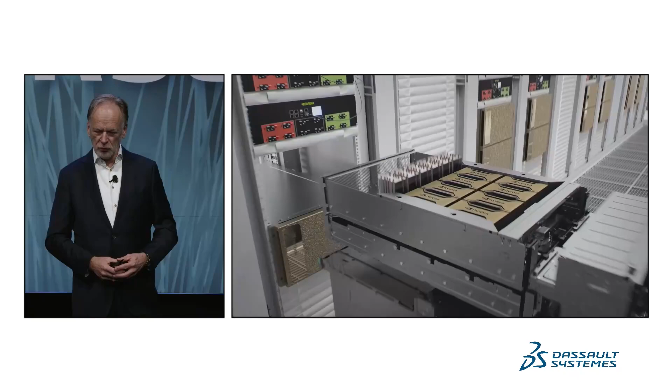Looking inside such a transistor, we see that it is actually a three-dimensional structure. At the lowest level, the finest structures are where we store our data or do our processing. But we have to get the data in and out, we have to get power in and out, so there's a three-dimensional structure of multiple layers, with the finest layers at the bottom and coarser structures on top.

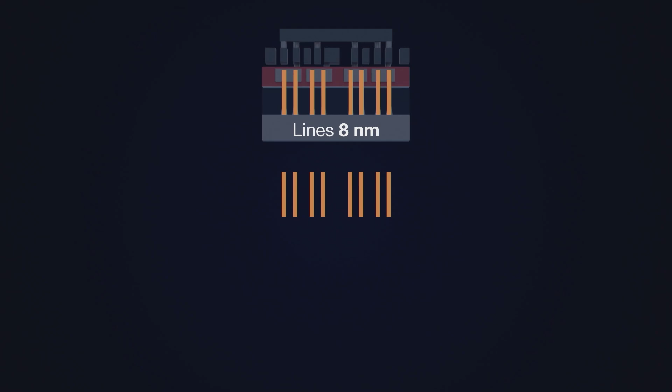And if we look at what we are able to print today, the finest structures are about 8 nanometer lines and an 8 nanometer space. To put it in perspective, 5,000 lines and space pairs would fit in the diameter of a single human hair.

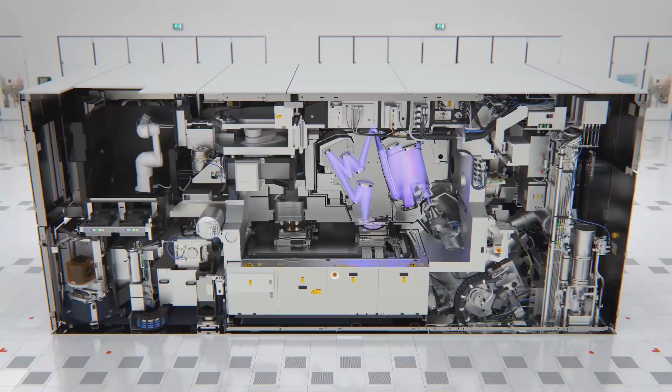So to print such a very small structure, or to print any structure, is done by the litho system, which is basically a nano copying machine. There is a pattern stored on the mask, which is illuminated by light, and that pattern is repeatedly imaged onto a 300 millimeter wafer. Thus the pattern is transferred into a single layer, and layer after layer are being built.

As mentioned in the introduction, what is critical, what basically describes the pace of our industry, the semiconductor industry, has been defined by Gordon Moore in his visionary paper in 1965, where Gordon Moore noted that an ever-growing component count, the number of components per chip, would increase, originally doubling every year. And as such, he predicted something like mobile home computing, which remember, 1965, the audacity to write that down.

So I took this doubling every year and extrapolated it 10 years from 1965 to 1975, from 60 components to 60,000 components on a chip. A pretty wild extrapolation. And it turned out to be ridiculously accurate.

One of my colleagues called this Moore's Law. Rather than just being something that chronicles the progress of the industry, it became something that drove the progress of the industry. And indeed, it did so for many decades.

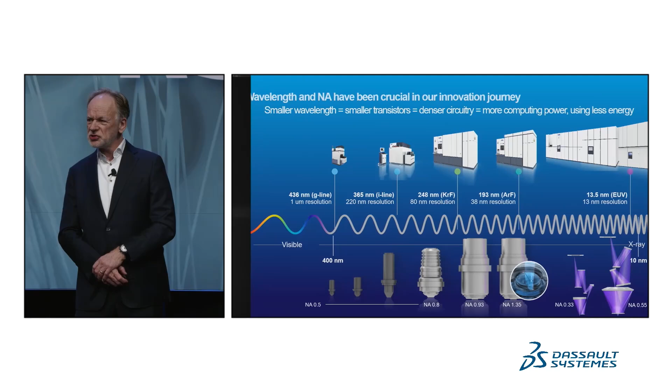So a quarter wavelength over NA is the smallest feature you can print with optical lithography. Over the years, the industry has progressed from one wavelength to another, changing the color of the light roughly every decade. We went from a mercury lamp, G-line, to an I-line lamp, mercury 365 nanometer, krypton fluoride laser 248, argon fluoride laser.

Within this decade, we actually increased the numerical aperture by making bigger and more powerful lenses. As you can see, we went from about 0.5 using the G-line lens about 40 years ago to the immersion lens, which has an NA of 1.35.

And then we made a giant leap. The industry made a giant leap. The industry moved from 193 to EUV, which has a wavelength of 13.5 nanometers, roughly a 15x reduction in wavelength. Remember, the critical dimension scales with the wavelength, so this gave unprecedented shrink capability.

But the EUV wavelength change did not come overnight, nor was it easy. First pioneering work happened in Japan, the US, and Europe in the mid-80s of the previous century. I myself started the program at ASML in '97. It took until 2019 to have your first phone with a chip made with EUV.

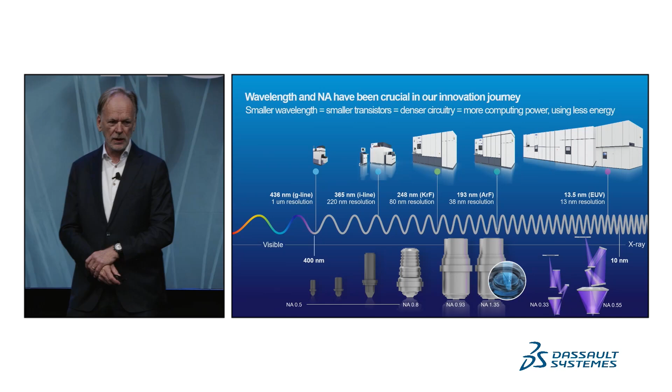And what made it so hard? If you look at the light, EUV light can be seen in nature, but only in the corona of the sun. That's where EUV comes from. So that means we had to make it artificially—we had to bring the sun into the fab.

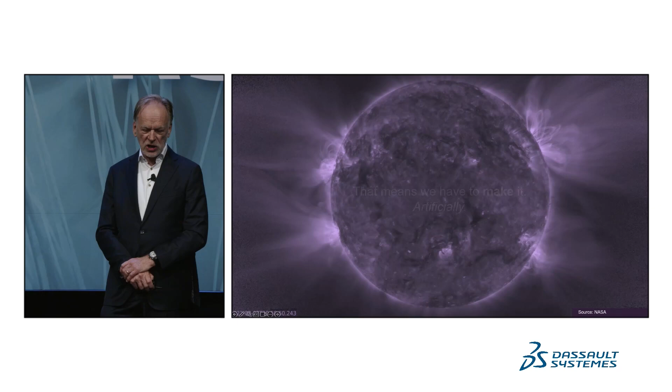The way we did it, after some trial and error—AI was not at our rescue at the time—we ended up with a setup where we shoot a very powerful laser at a tiny tin droplet, about 30 micrometers, into a vacuum vessel. We hit it with a laser twice: first to turn it into a pancake, then to generate a plasma, making it about 500,000 degrees Celsius.

And you do this 50,000 times per second. That way you can generate enough EUV light to have a production-worthy, high-volume system. The light is then captured by the optics and shined towards the mask, which is finally imaged onto your wafer. So why was it so hard?

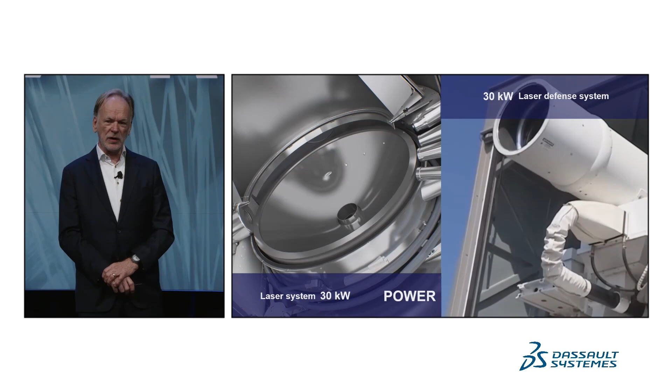Next to the science of understanding plasma and physics, there were major technical innovations required on the engineering side. To put it in perspective, we shine a 30 kilowatt laser on one of these tin droplets—the equivalent power of a military system used to shoot down tanks, satellites, etc. So you don't want to be a tin droplet in your life, ever.

Secondly, the optics—this is even more astonishing. The optics come from a good partner called Zeiss. The aspheric optics are made with a precision of 20 picometers, about 1,000 times more accurate than the James Webb Space Telescope.

Not only are they able to produce it so accurately, they also position the mirror with unprecedented accuracy. They can shine light with such precision it's equivalent to hitting a coin on the moon with a beam of light from Earth. So this was just one of the technological challenges that had to be mastered, next to the source.

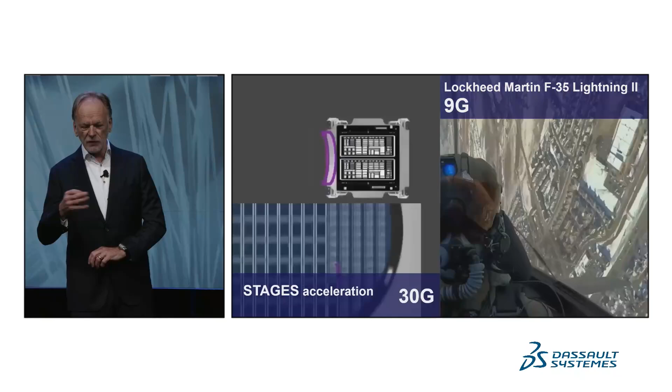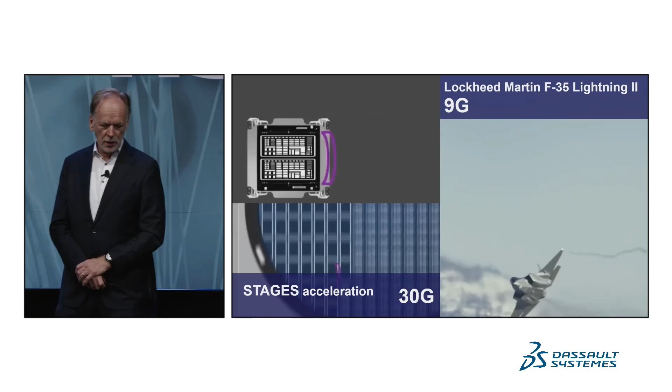And to make it cost effective, you have to produce many of these wafers per hour—up to 200 wafers, each with 100 fields per hour. That means you need very fast moving stage technology. Stages today accelerate up to 30 G, about 4 times higher acceleration than a modern fighting jet.

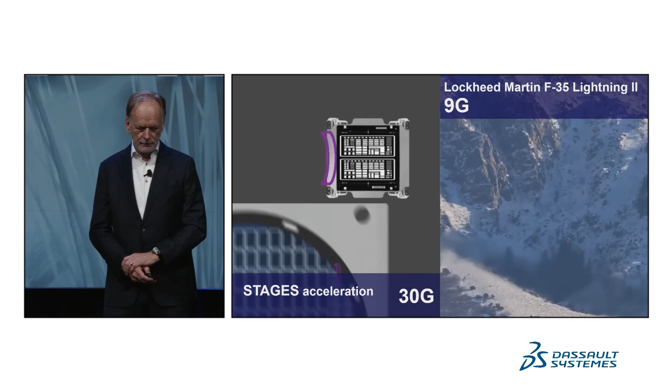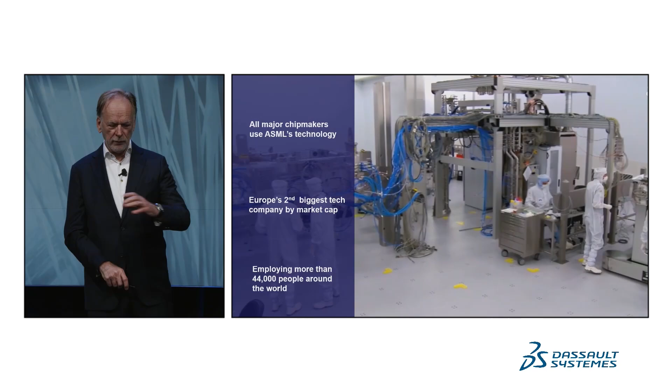It started with 31 employees as a joint venture of Philips and ASM. And to be very honest, Philips wanted to get rid of it. So they separated them. Today we are a worldwide operating company with sites in the US, in Asia, as well as in the Netherlands. But this is our headquarters where most of the R&D takes place, where we build, I dare to say, the most complex machines mankind has ever built. And we are the second biggest tech company, and we went from 31 to 44,000 employees in just over 40 years.

The ecosystem consists of customers. Customers are not only important because they pay the bill, customers are also critical to determine your long-term roadmap. Our lead time to design and realize a new system can be 10 years. So it's critically important to align with your customers what, 10 years from now, would bring value to them.

Academics. It's not a classical model where you do a PhD study and then years, and that still happens a lot, and rightly so. But we actually often stumbled across something that worked and didn't understand it. So we had to work with leading experts, leading academics in the world to help us to understand and make the next step.

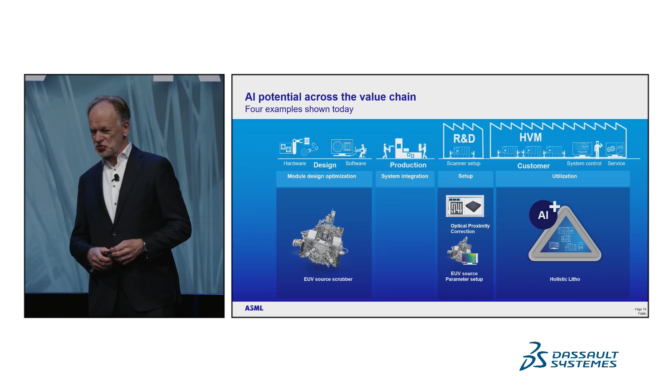That brings me to the last section of my presentation. How do we use AI? And we use it across the value chain. We use it in design, we use it in production and customer support, also at a customer base to set up and utilize our tools. And in view of time, I'd like to give 4 examples along this value chain, but there are many, many more examples that could be given.

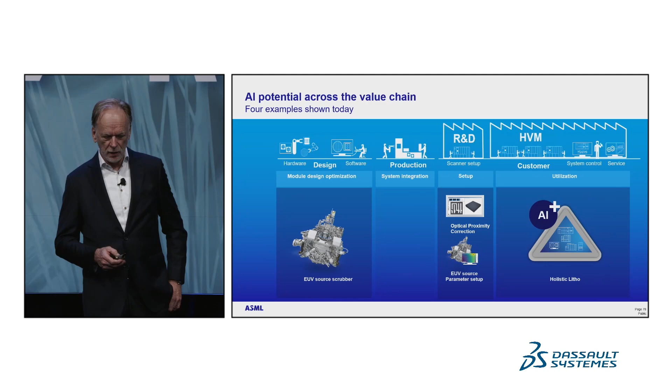First, let us go back to the EUV source, which I already introduced. We shoot with a very powerful laser at a stream of tin droplets. But next to EUV, the big question is, where does the tin go?

If the tin ends up at our optics, we will quickly lose the light. So the system has an elaborate system of hydrogen flow, which actually picks up the tin, forms also tin hydrides, and it has to be pumped away from the vessel to avoid it completely clogs. And what is an important element is the tin scrubber that has to remove the tin from the vacuum to avoid everything is clogged downstream.

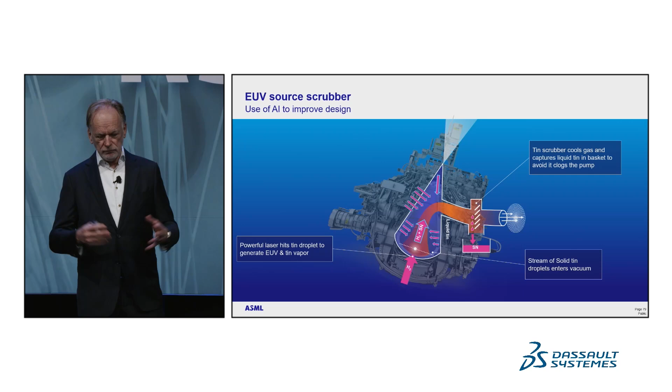So the function of the scrubber is simple: remove the tin, but it's a complicated engineering task to be done. So we did it in a classical way. You have all your modeling, which is actually very elaborate, because you need plasma modeling, you need flow modeling, you need thermal modeling. After many years, we came up with a baseline design scrubber. Then we trained the model based upon our physical model and used it to generate many, many more designs. About 12,000 designs were generated in a relatively short time.

And at first glance, these AI-generated designs look very favorable. So I'll give you a few KPIs. The pressure drop, so that means you want to have a low pressure in the vacuum, not to absorb the light. And you don't want to have big pumps, so a significant improvement. The thing was much smaller. But then when we had humans look into it, and again, let me emphasize the importance of collaboration between science and suppliers, we quickly found out the thing could not be made. It was way too complex.

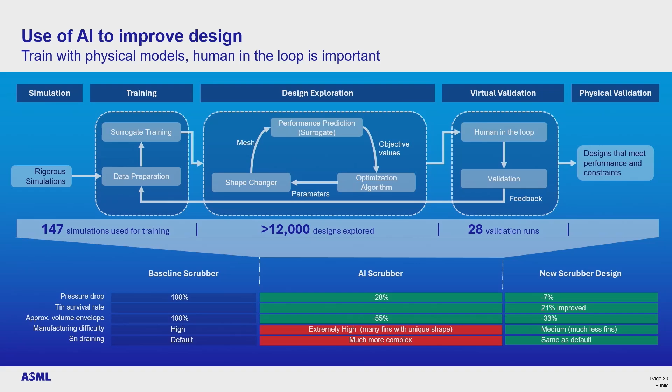So we had to retrain the model and ended up with a new design that actually does improve pressure drop, volume, the tin survival rate, so it captures more tin, and it was in fact easier to manufacture. So the key point of this example is AI was great, but it had to be trained with physical models, and the human in the loop was still very important.

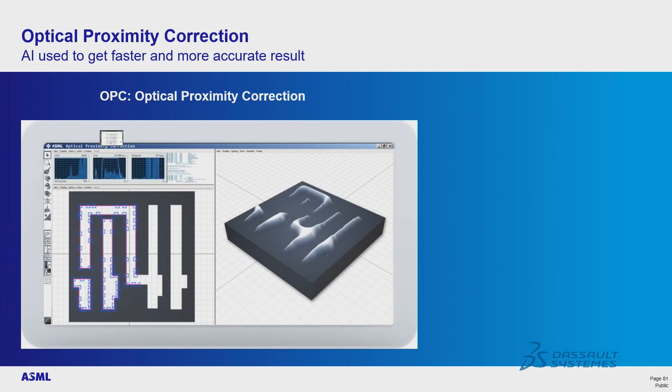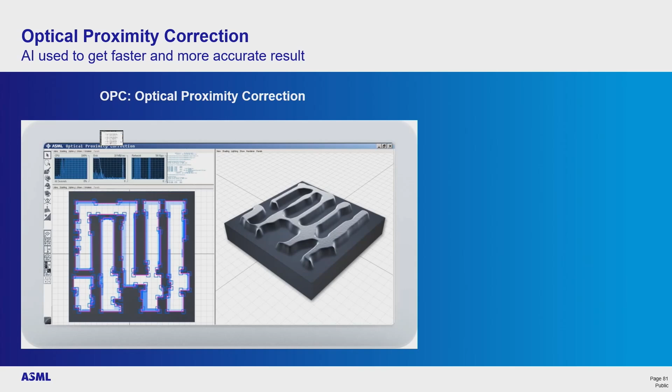The second example I'd like to share is optical proximity correction. Let me explain it in a few sentences. As mentioned, we have a pattern on the mask which we want to print repeatedly on a silicon wafer. But due to the fact we are very close to the diffraction limit of the light, what you see in the mask is not what you get on the wafer. So you tune your mask to get a feature on the wafer that is as close as possible to where you want it to be. So by taking parts of the mask away and adding other parts in the mask, you see this in this animation, you end up with something on the wafer which you are looking for. This is called optical proximity correction.

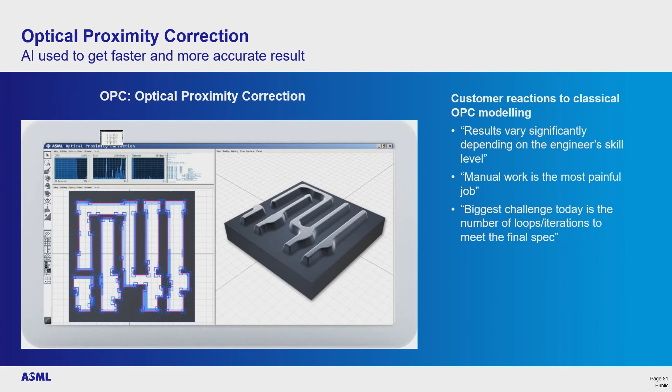Extensive physical models exist to do the job. However, they are typically iterative. And if you talk to customers, they say, well, the results actually vary by the human in the loop. It takes a long time to train the engineer. The manual work is painful. And the biggest challenge today is the number of iterations or the time it takes.

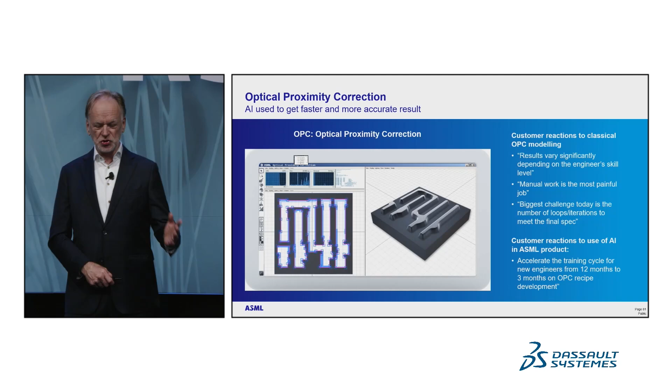Using machine learning brought many advantages. One of them, and here I again use a customer quote, one of our leading customers, it greatly accelerated the learning of new engineers. Next to this, there are a number of publications made on this. When using the inference, it was also much faster and more accurate. So this was a great example how AI is used in a product at our customer side.

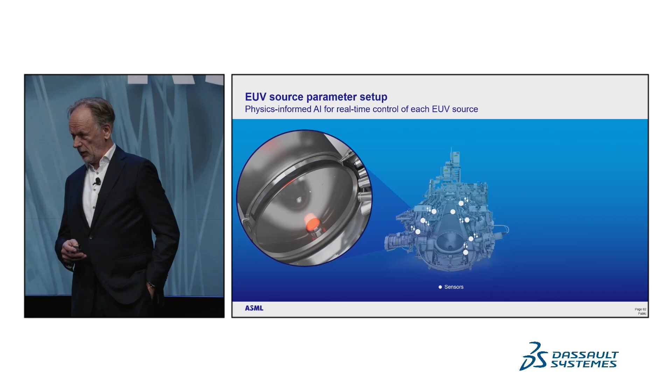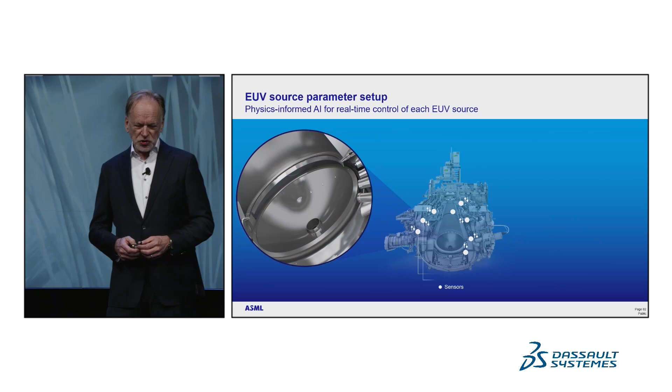Back to the source, again an example of optimizing the source. So the first example was on designing the source, or an element of the source. This was on optimizing it. There are many sensors looking into the plasma, side sensors looking into the light, measuring the flow, etc. We used the data from all of these sensors and fed it into a physics-informed neural network by using historical data as well as physical constraints.

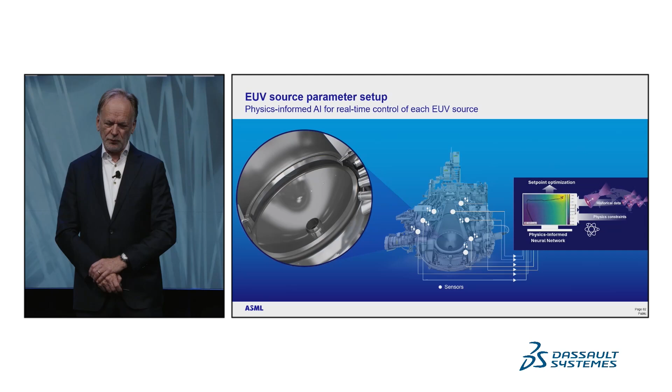And using this physics-informed neural network, we optimized the set point and fed that back into our source, into the many actuators. Actuators, you can think of how to shape the light source that hits a droplet in time, in spatial domain, etc. And by doing so, we were able to achieve 1% more light. Well, that may sound like very little, but 1% more light corresponds to about 0.5% more productivity. And 0.5% more productivity of a tool that costs several hundred million euros is still very significant value.

Last but not least, holistic lithography. Again, let me introduce it with a few sentences of what we mean with holistic lithography. Traditionally, ASML sold what we call a scanner, this nano copying machine. And we complemented that by what we call compute, or nowadays you would call it the digital system, and metrology. Metrology that can measure anything, any function within the scanner, but also metrology that can measure what actually was produced, the image produced on the scanner, and measure it outside the scanner.

And there's an endless stream of data coming from one of these systems, including the metrology. All of this is fed into a digital twin and used to optimize the settings of the machine. And why is this so critical? Why is it almost becoming impossible to do it in the classical physical modeling way? It has to do with A, the requirements we need to meet, but B, also the knobs we have available.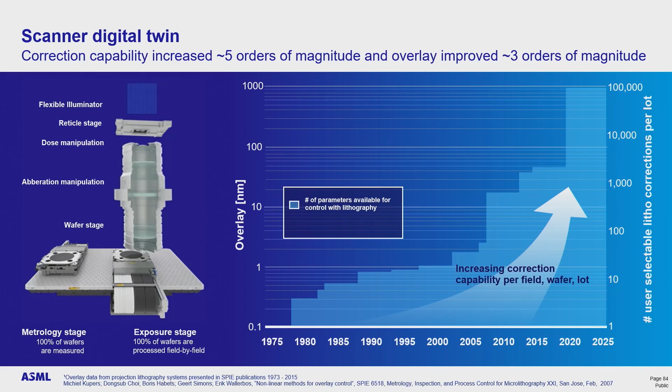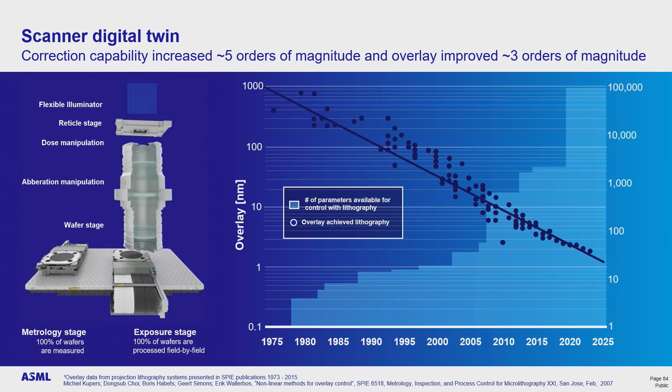The knobs include how we position the stage, the reticle, the lenses, and the actuators in the lens, as well as the light going at your reticle. So we have at our disposal about 100,000 knobs that are fed by 1 million data points. And using all of this in combination with a digital twin, here now you see the measured results, we were able to improve overlay by 3 orders of magnitude. A very critical usage of the data that becomes so abundant that it is almost impossible to absorb it and make best use of it in a classical way.

With that, I have come to the end of my presentation. I hope I shared with you how semiconductors fuel the AI boom we all live in, how ASML with its systems helps the Moore's law that builds these very powerful semiconductors, and then going full circle, how AI helps us to build better systems to all of our benefit.